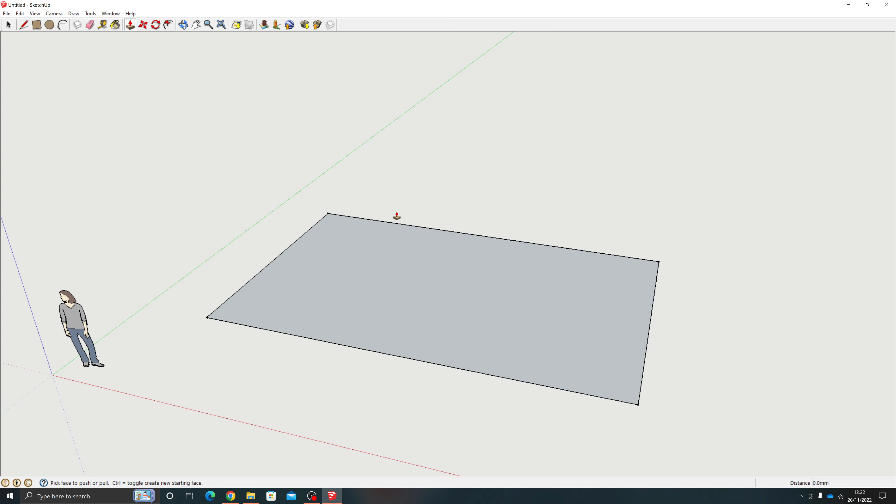So for our desk organizer, I'm going to start with a rectangle. As I'm doing this, you can always pause these videos, try doing some of these bits, and then come back afterwards and I will show you those bits. So don't feel like you have to watch the entire video and then try and do this.

Now I'm not doing this with measurements. This is more about getting used to the software and just showing you some useful bits, so I'm not going to use measurements at the moment. I just want to get used to how this works.

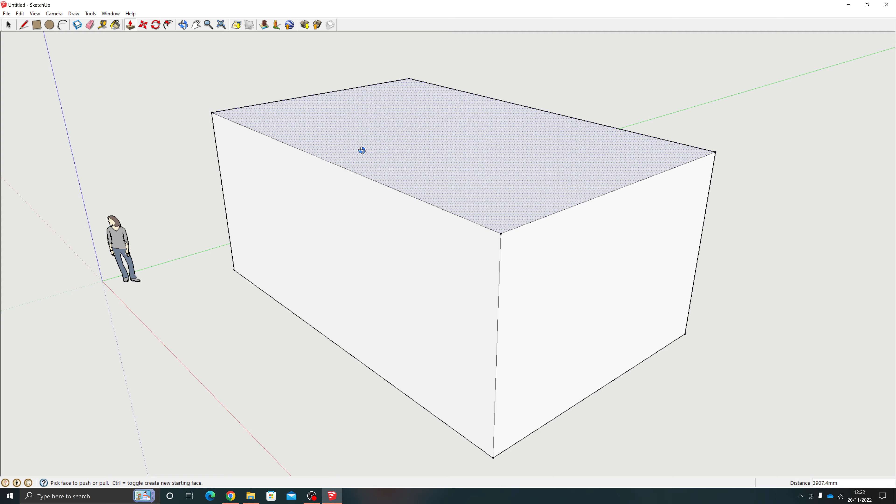So I've started off with my basic outside shell. What I'm then going to do is draw on this front face here. If you want to look directly at the front face, you can go to Camera, Standard View, and choose to look at it from the front. This means it will lock us to look directly at the front.

What this means is now I'm going to be able to draw on this without it confusing the software or confusing me. So the idea with this is I'm going to start adding some drawers onto here.

Now I could offset this slightly if I wanted to give it an outside edge, because my material would have a thickness. That's the thing to remember: when you're drawing on this, essentially SketchUp has like a zero thickness, think of it like a skin. It's very thin, so you have to make sure you tell it to add a thickness.

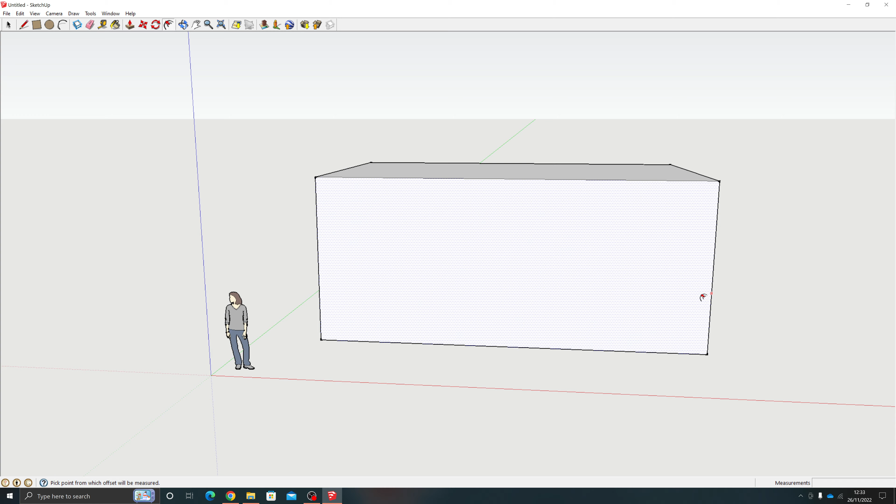So if I undo that, you can undo things by doing Control and Z. If I try to push pull this, it will think I want to make the whole object smaller. However, if I've offset this and chosen it to be away from the edge, if I now move this, it's only going to move the inner part, which can make it very useful for my actual design.

Now what I want to do is add a set of drawers. If I want them all to be the same size, what I can do is draw my shape. What I'm going to do is add a cutaway afterwards when we actually make the drawers.

So if I want to copy this, Control and C is the shortcut for copy. If you right click, there isn't actually an option for copy, so you have to remember the shortcut is Control and C, and then Control and V will paste it, and you should see that it is the exact same size.

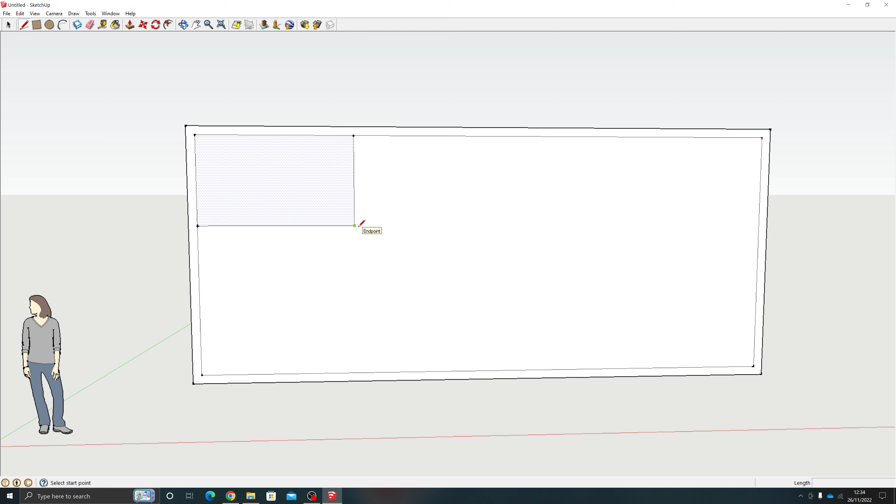If I line it up with this bottom corner here, I can then keep it aligned across here. If you want to make sure yours are completely aligned, you can add a line across here, and this will, when I paste it, mean I've got something to lock it onto, so I don't just randomly place them. If you want to be even more accurate, you can also add our tape measure, which I showed you in the previous video.

I could actually choose how far I wanted this to be spaced apart from each other, and I can put a little point on there, and that's just my measurement point to show me where I would need to position this. So if I did want to use a measurement from here, let's say, because this is quite big, I'm going to set this to 190.

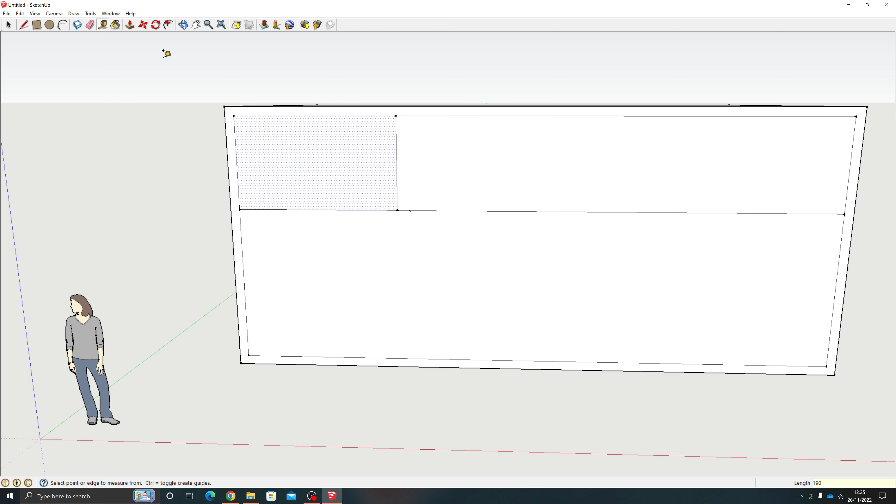So just for this one, I'd set it to 190. I'll click 190, and you can see that it's added the dot. Then I'll do my Control Paste, and it can lock onto there.

I could do the same for this one here. I'll click on this endpoint, do my 190, add my dot, and... doesn't seem to want to add my dot to that one. Let's try it again.

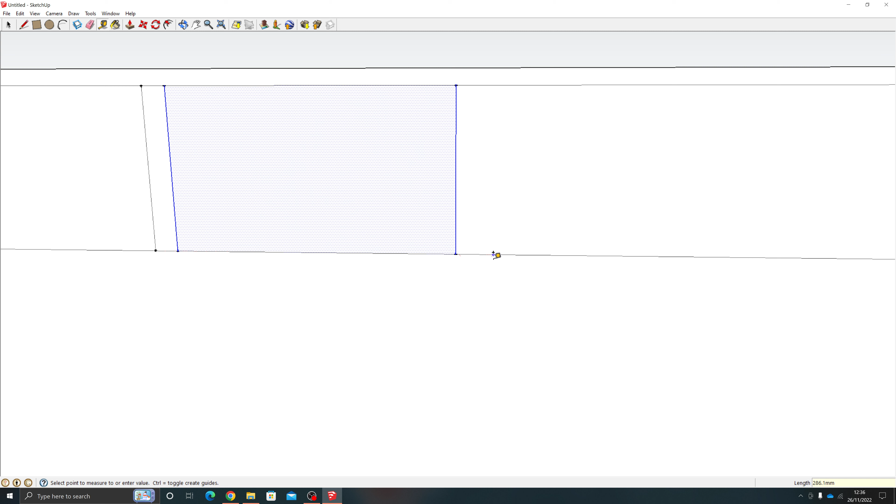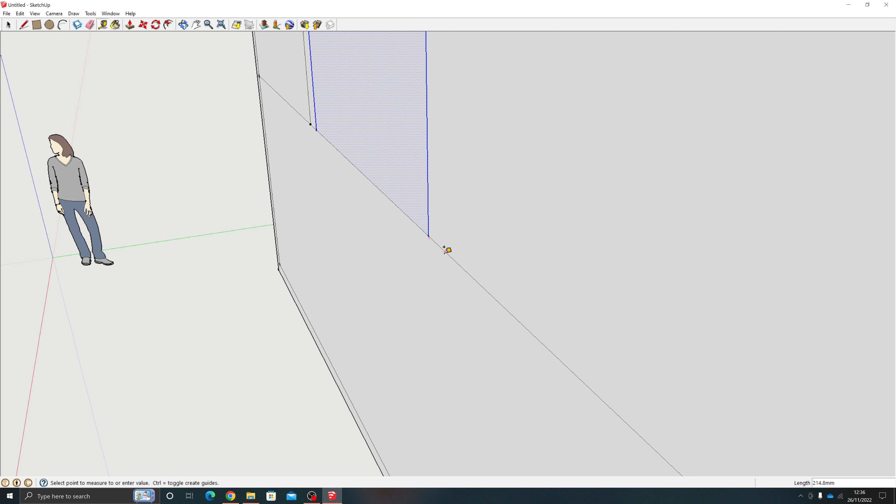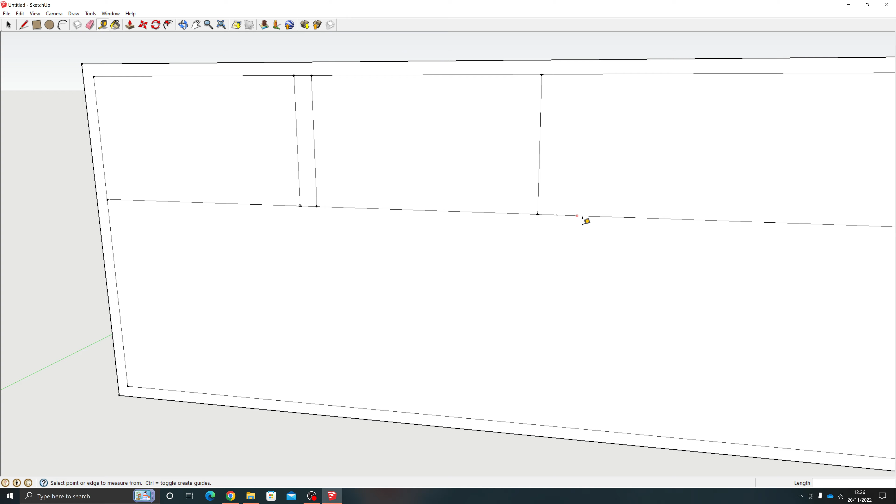I'll try it again. Move my mouse until I get to 190. Might be because I've got something selected, so I'll push escape and deselect everything. I'll try that again. That's better. It didn't seem to like that I had this selected, so you probably need to deselect anything you've got selected before you do that.

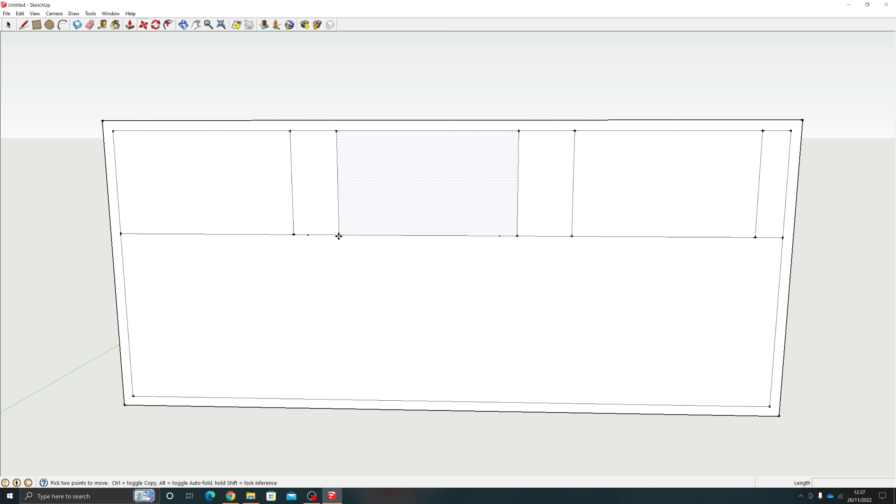Like so. Then I could decide to move these to space them out to different sizes. Because I've got them already at the right size, I can just space and move them. At the moment I'm just doing this roughly by eye - it's not about accuracy, it's about understanding these different parts and components. Once I've done this bit, I'm going to move this one as well.

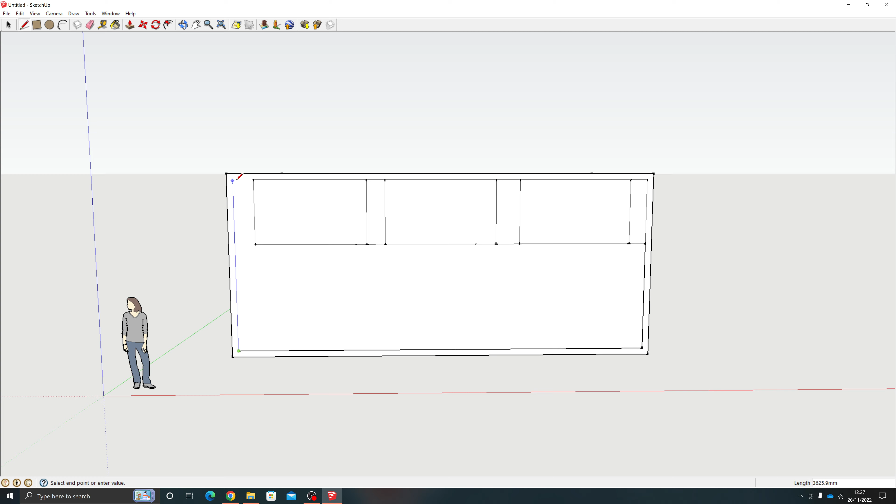So I'm going to rub out that line so I can move this across a bit. I'll draw the line back in, so that one goes up to here. I'll make sure it locks up to this line here. What I can do is draw a line across here, and if I get them to overlap, I can just rub out the extra line - same sort of thing you'd do in 2D design.

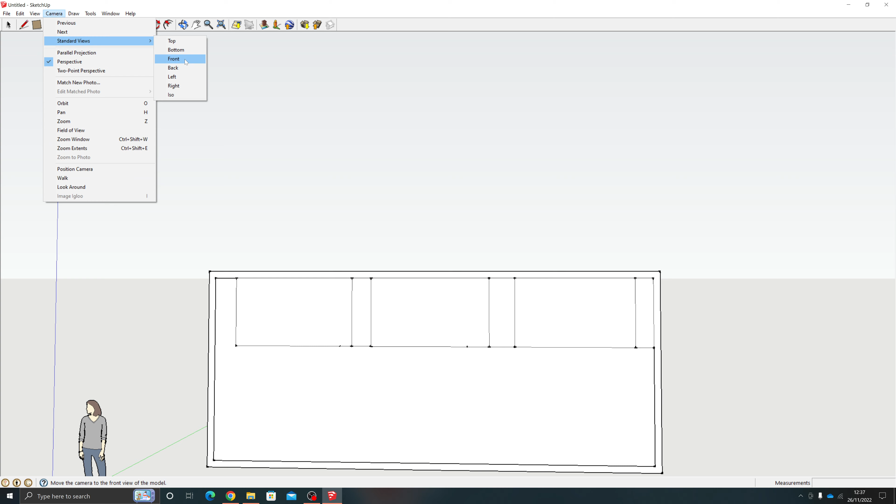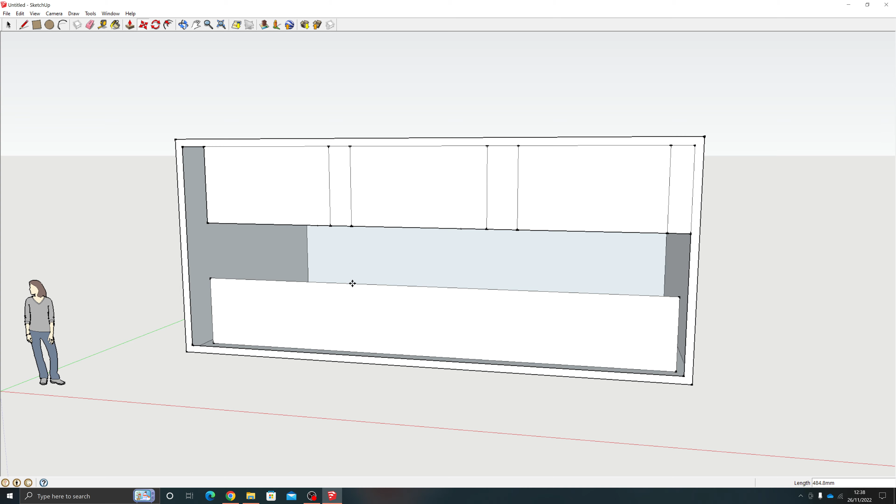If I go back to my camera, back to standard view, and look from the front again - it's good practice to make sure you're still looking from the front. I'll have my rectangle shape down here as well. Again, you can always move these lines to get them positioned how you want so they're in a good position. I'll do that again.

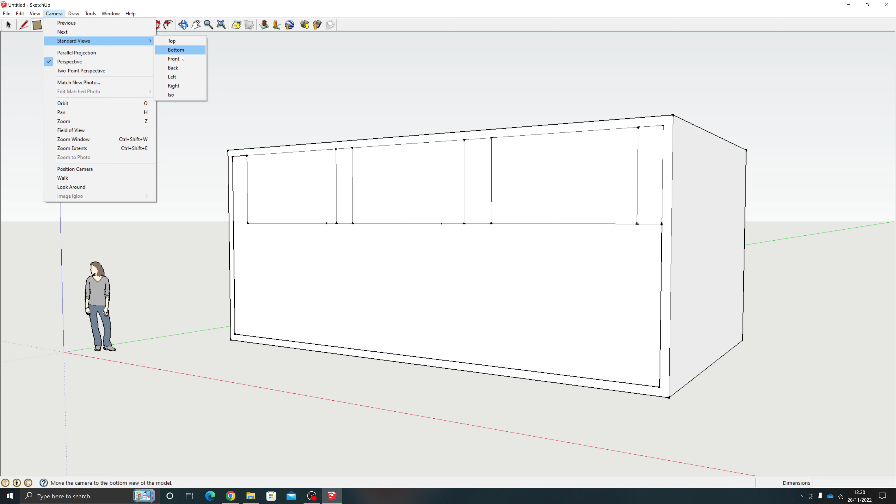It doesn't seem to like it if I do that, so I'll rub out these lines and draw them again. So again: view, my camera, standard views, front, and then I'll draw that rectangle again.

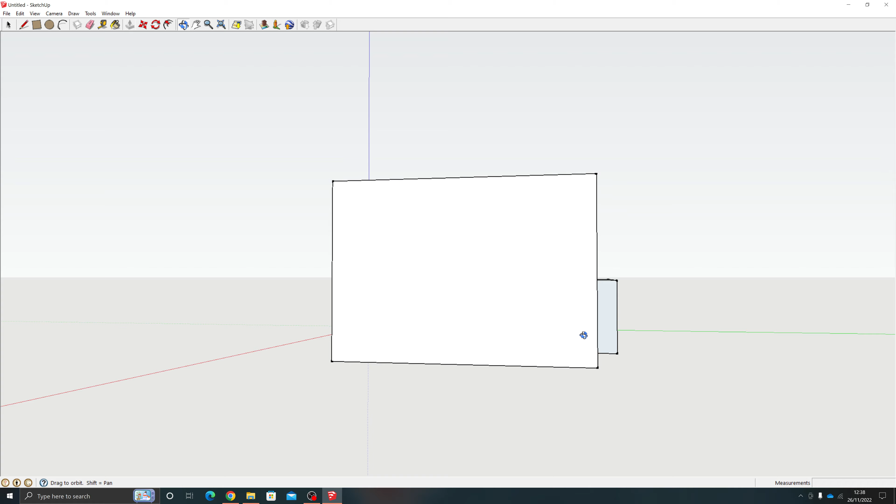Like so. Once we've got these done, if I drag these backwards, what I'm doing is giving this enough space to have drawers in. If I drag it to here, I don't want to go all the way through the back, so I'll do it to about there. If I want these to go back the same amount, I can make it go to the face - that means it's actually going to be pulled back the same amount, so you don't end up with it going all the way through.

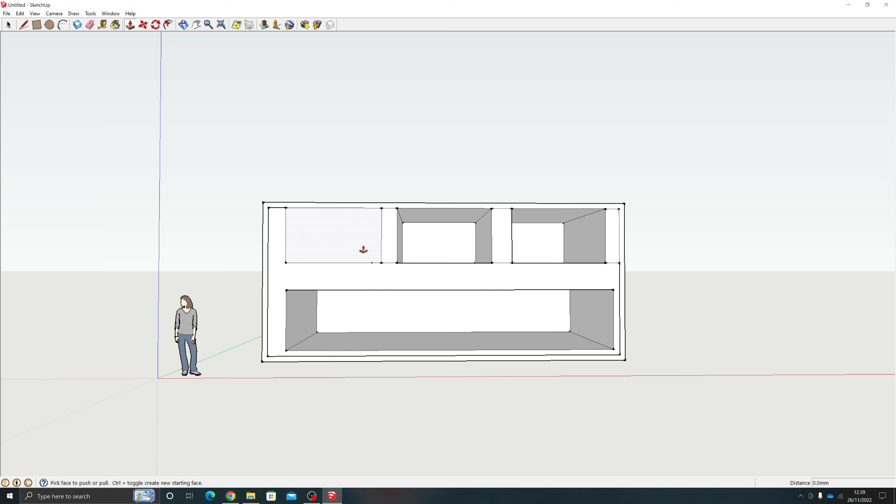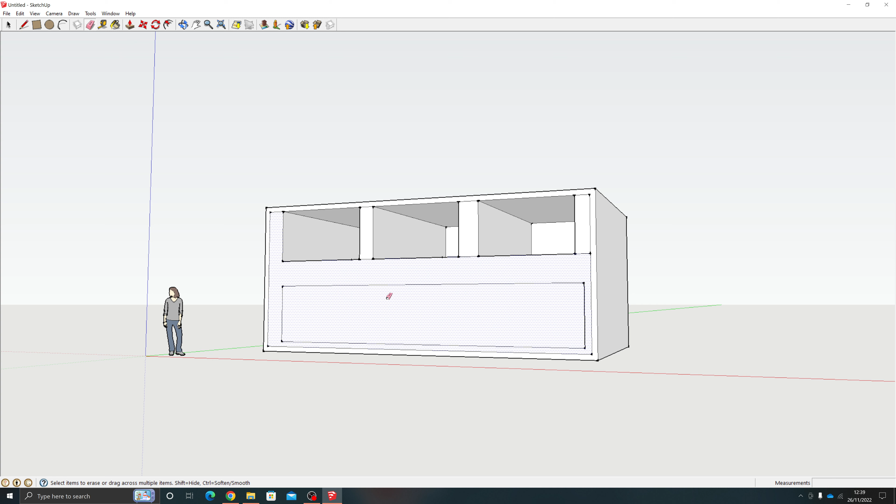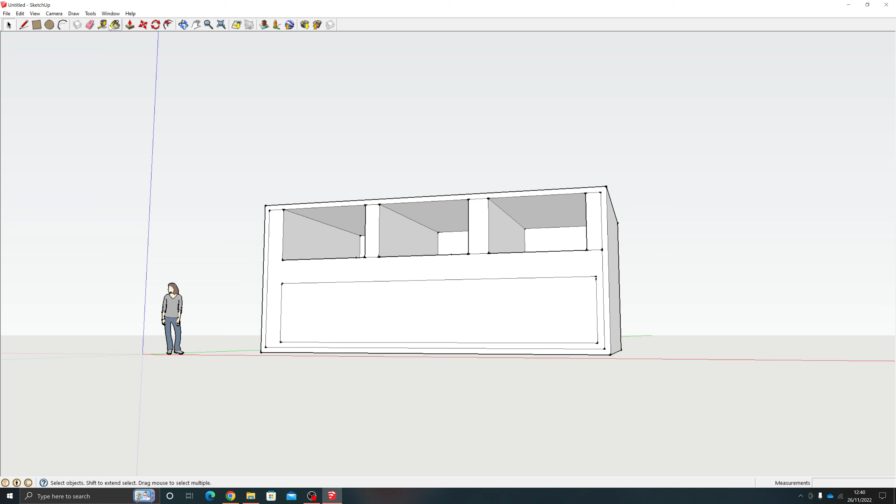You can just hover over that, and you should see it highlights to say 'on face' - that basically means it's lined up with it. Sometimes it will try to auto fill things in when you've done that. If you need to get rid of any faces, you can select them and get rid of them. If, like mine's not doing, it doesn't let you do that, you can draw the face again, then click on that, delete it, pull that back again, do that on that face, and then I've got my first drawers here.

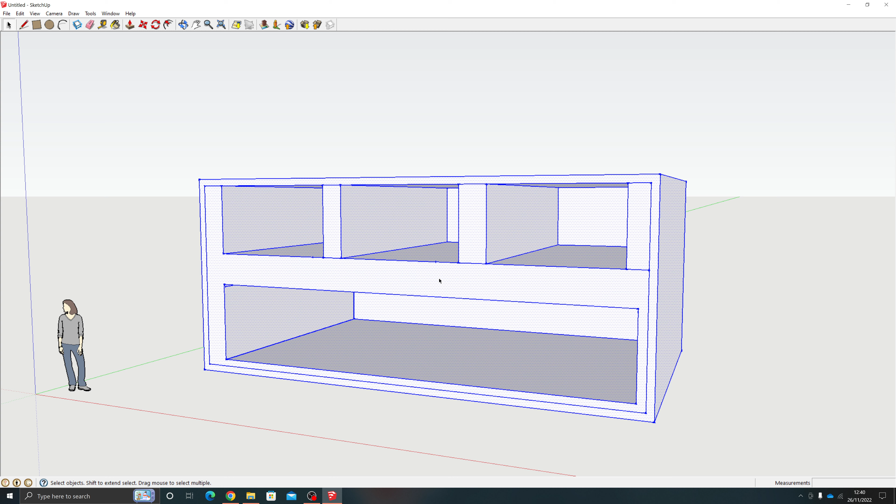Now I said before that we were going to look at making sure we had components. So what I'm going to do is select all of this, and I want to treat this as its own component - I don't want it classed as something else. So I can now select all of this, and do component or make component, which lets you give it a name.

So I might call it a desk tidy base, something like that, and then I'll do create.

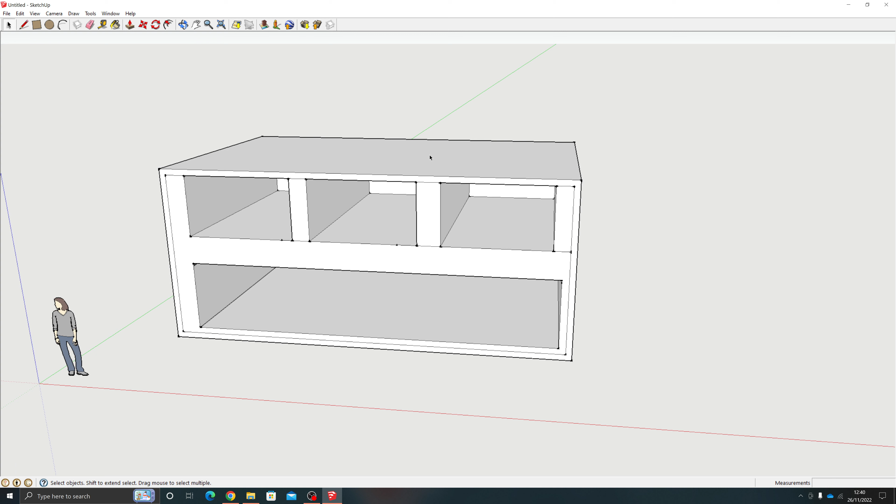So now that is classed as one component, so when I click it, it will select the whole thing at the same time. What this does mean now though is I can actually start drawing and designing other pieces and other parts.

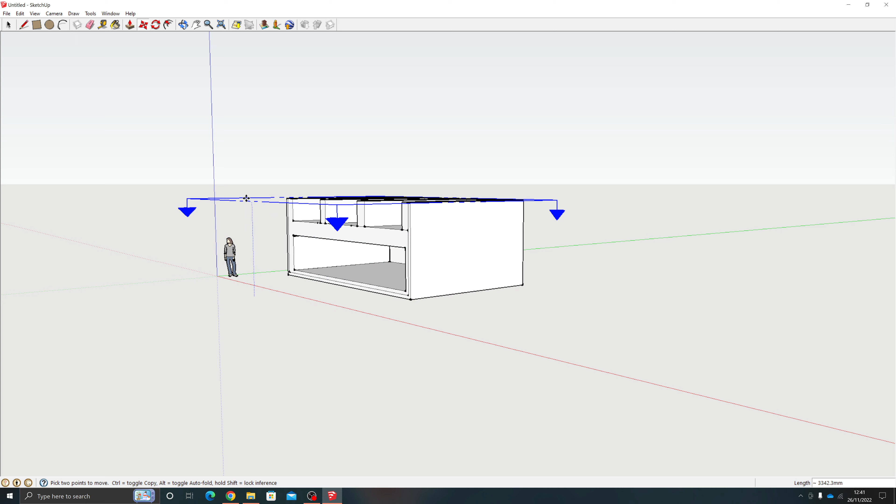Now sometimes you need to see through an object, so what we can actually do is use tools, and we can use something called a section plane. A section plane allows you to cut through objects. So I've clicked, and what it's done is basically drawn a plane, and if you imagine this as slicing through the object, I can click the move tool, and as I move that up, you can see it reveals more or less of my design.

So I want to get to this position here, because what I'm going to do is start designing the drawer that I want to go in here. And because this is a component, it means that my parts aren't going to accidentally connect to this. If you don't do components, what can happen is it can try and merge all the pieces together.

So what I'm going to do is have one side of the drawer. I'm actually going to add them as if this was the actual size of the drawer. Do it like so, and I can, again like we've done before, select this, Control C, Control V, and paste this over here.

And then what I want to do is rub out these lines here so that I've got a solid part that's going to extrude. Basically, I don't want it to be separate parts.

And because I want this drawer to fit flush with the front, I could actually fill this bit back in here and then use that bit here, copy and paste, and bring that to the front, and then rub these bits out. Now, again, some of these things you sort of figure out as you go along.

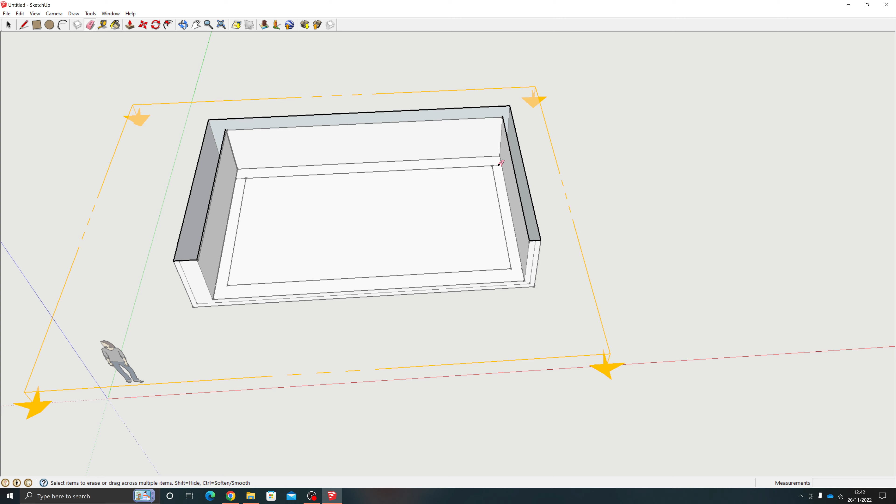There are different ways of doing this. I tend to use a lot of copying and pasting because then I can make sure that my components are the right size. And I'll bring this up to just below that point there.

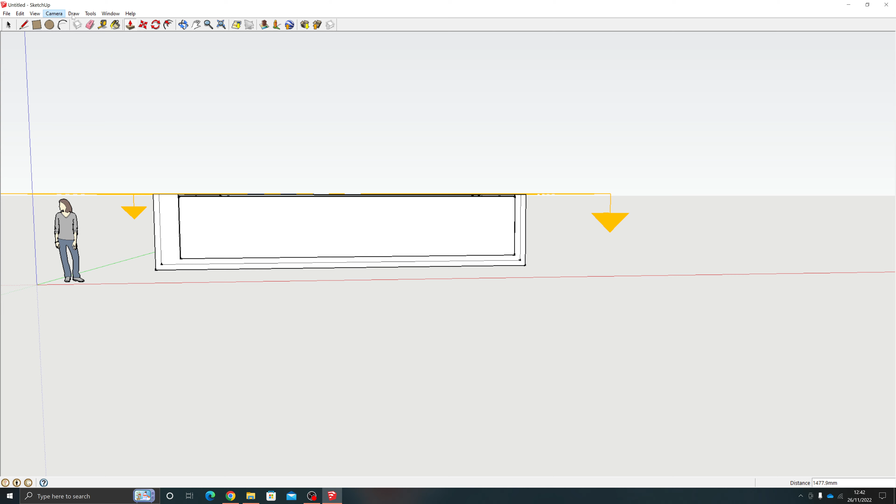And then what I want to do is look at the front view. So again, I'm going to go to my camera, go to my standard views, and go to front. I'm going to add a circle in the middle.

And the reason I'm going to add a circle is because I want to add a part that people can actually use their fingers to grip onto. You could use a circle, or you could use an arc if you want to.

So if you're going to use an arc, you'd need to draw it kind of the other way around. So what I might do, just to help me with this one, I might draw from this midpoint, and to make sure they're the same length, I am going to use measurements for this bit.

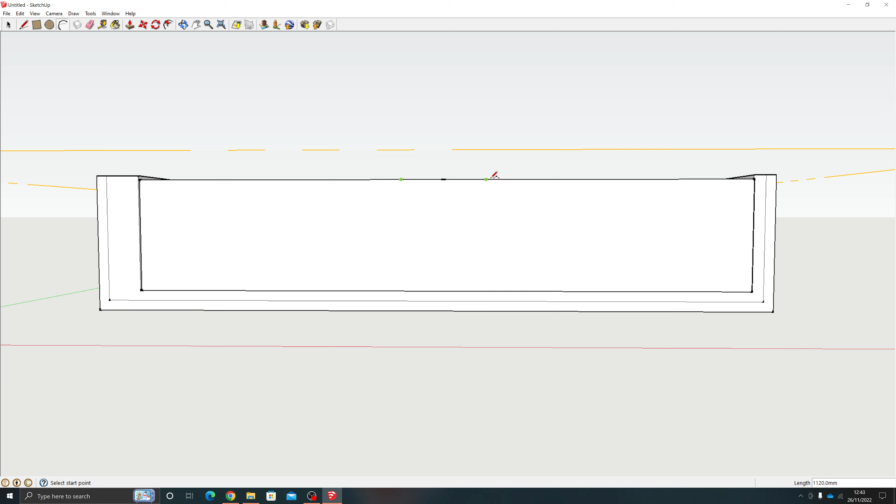I'm going to make them 560 across that way, from this midpoint 560 to the right, and then what I can do is arc from this end point to this end point here, draw this down, and then click, and then I've got my finger groove bit here that I can then remove.

Now when you drag this back, if you want to completely remove something, you'll see it says 'on face', and you can see it makes a different sort of colour. It goes and changes colour.

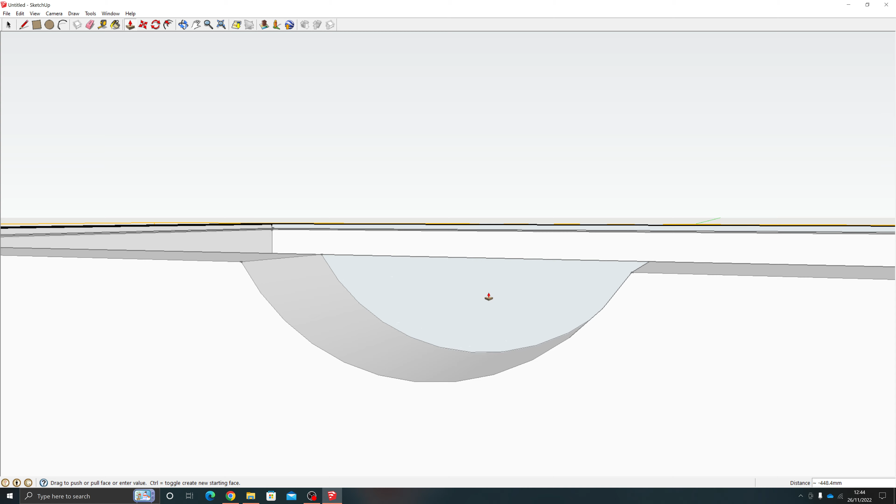So you should see that as I'm pulling it back, all of a sudden it snaps and changes colour. If it says 'offset limit' to blah blah blah, what that means is that if I click now, it's going to delete it. So you can drag all the way back and then delete, which can be really useful for any parts that you want to remove, like cutaways like that.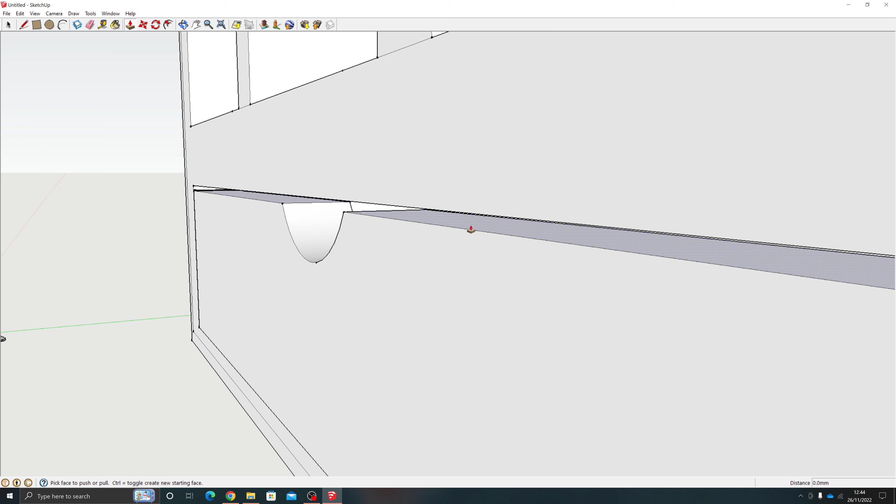Now I could drag this up, and you should see that I've actually managed to make this cutaway here. And what's quite nice is if I want to pull this up, because it's not quite right, I can actually just click on it and just drag it up.

I'm going to give it a tiny gap if I can. Okay, and again, you can zoom in to get more accuracy. So it's only a couple of, just a few millimeters under there.

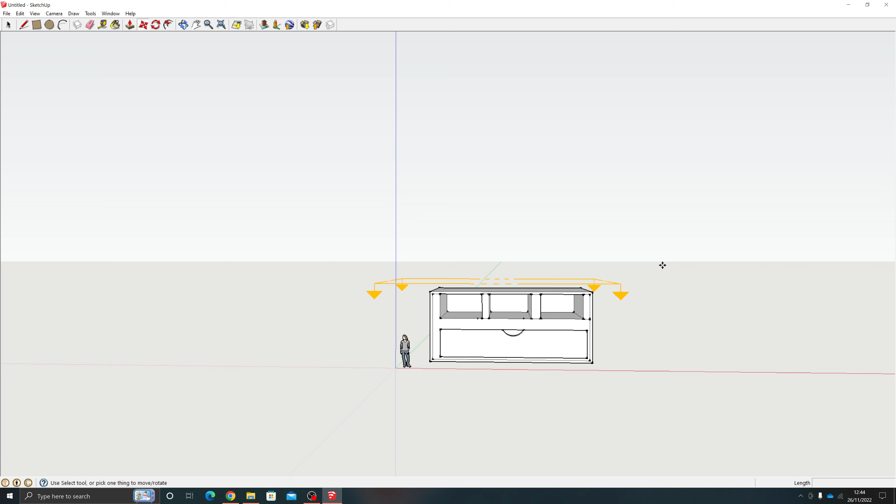Now this is where it becomes so important that you've used components. If you don't use components, this bit won't work. So what you have to do now, if I select all of this, is hold down Shift and click the exterior, and what I'm left with is just the drawer as a component. Now if I do make component, and I'm going to call this bottom drawer, if I click create, that is now its own component. So I can click that and select this separately as its own entity.

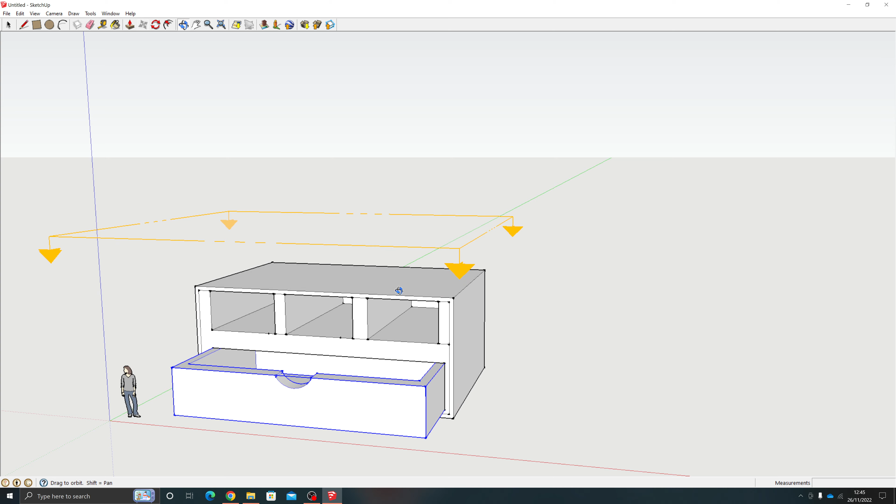Now, the reason that's so useful is because as part of my development, if I wanted to show this as a different view, I can actually move these out. So if I select the drawer, look at this from the top view, and click and move that, it now means I can show this drawer from different views. I could have these parts slide out, which can be really useful for your screenshots to show how you've created something. So it makes it much easier to work with.

I know some people try to create the drawers already out, but it's so much easier to do it this way as a separate component, and it saves you a lot of time, because I can take this apart completely and view this as its own component. So you can see, you can almost do exploded drawings because they are individual pieces.

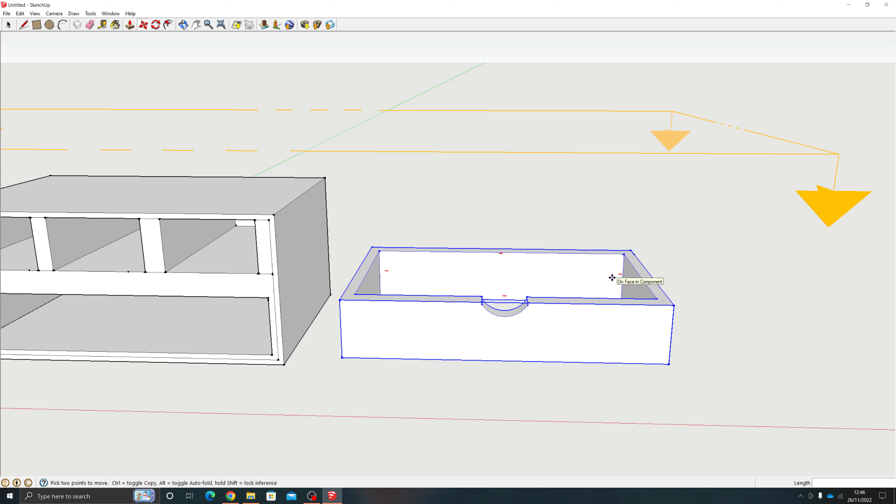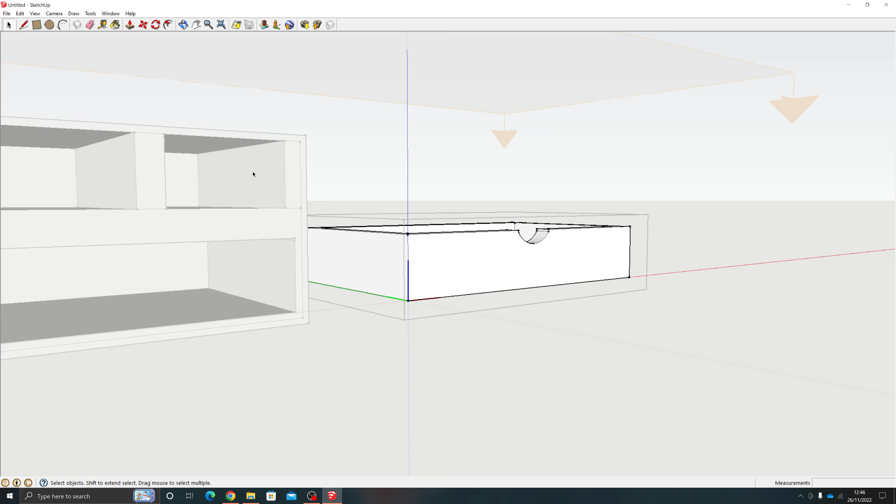Now, if I want to edit this one, because I've noticed this has no base on it, what I can do is double click on it. Oh, I'll deselect it - I've still got the move tool. So black arrow, double click it. What that means is I'm editing this component, so nothing else matters. I can't impact this product. I'm only drawing on this.

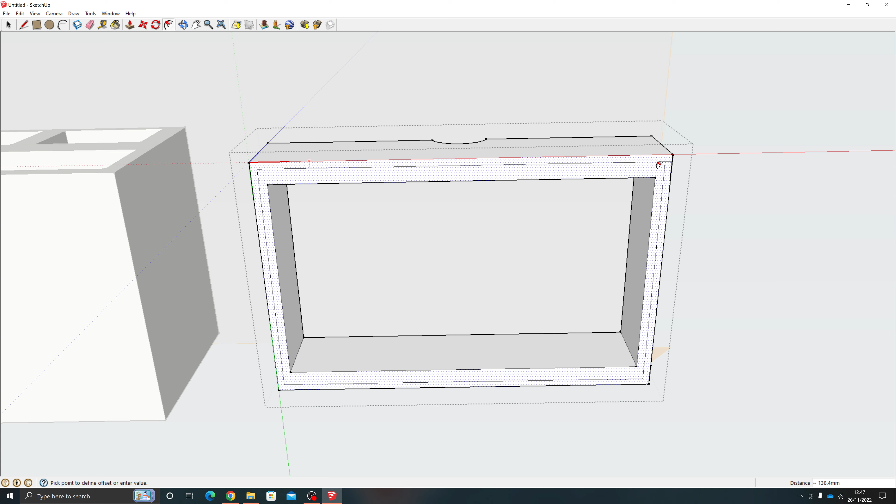So to make this a bit of a realistic base, I don't want to just glue a piece on the bottom because I wouldn't do that. What I would do is inset this using a rebate plane or a router to add grooves along the bottom here. So I'm going to offset this bottom piece like so, and pull this up to give it a cavity where I would glue an actual base piece on.

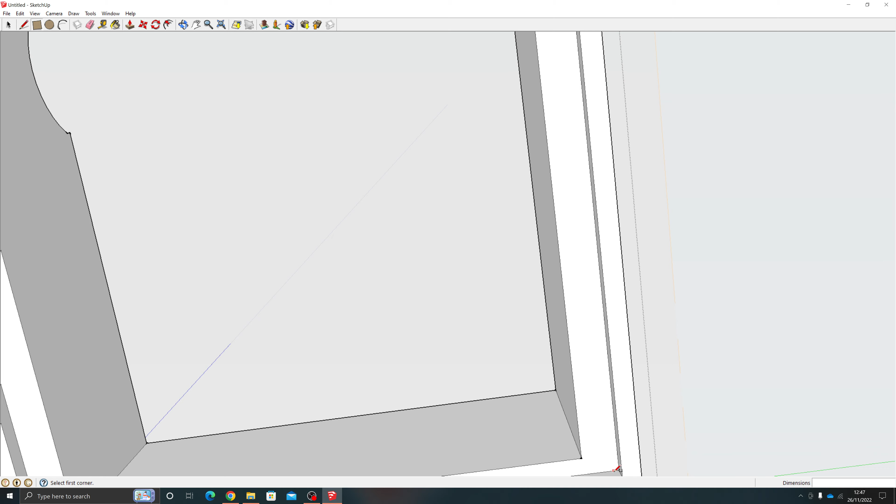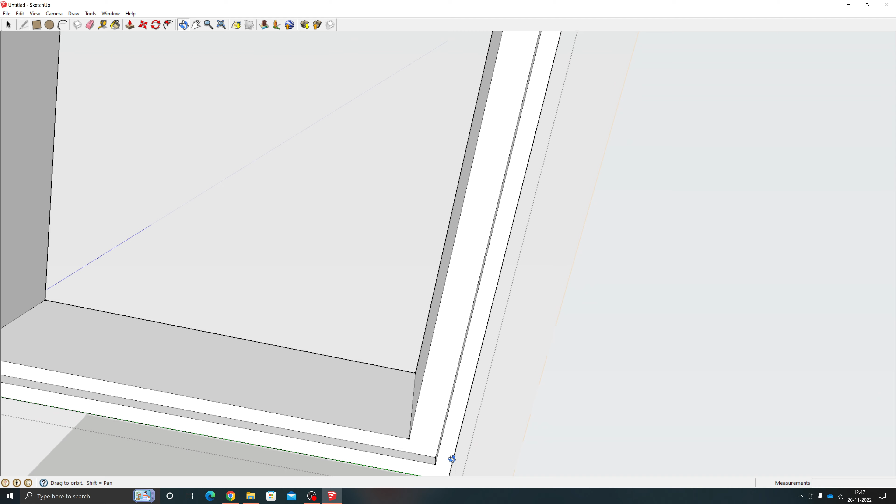I'm then going to draw my actual base piece going across, from this corner here to this corner here. Try and angle it a bit better there, so I'll get it to go there. If that hasn't filled in, sometimes you have to draw angled lines across to get it to fill in different surfaces where they're not quite aligned to each other.

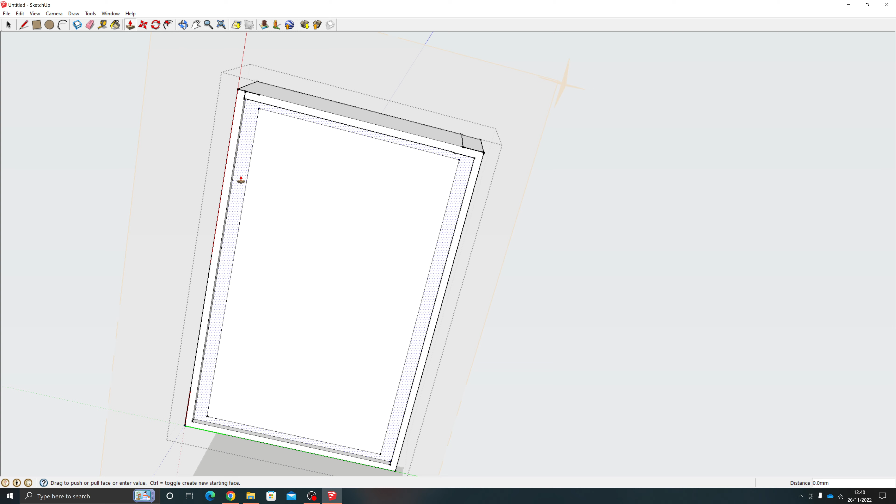So now that I've filled that one in, I can extrude this back down, but I'm going to rub out that line because I don't need it now that it's filled in. Now I'm going to pull this bit down and this bit onto there. So you can see I've got my base piece that would be glued in - I don't have to do it like that, but I think it looks nicer to really think about how you're going to construct this.

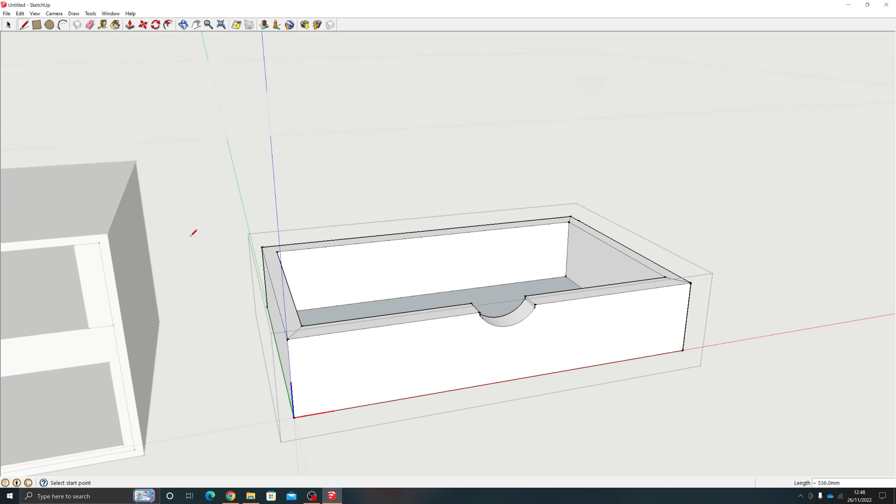And if you really wanted to, you could also have lines drawn here to show that you were going to use miter joins or something like that. You could draw your finger lines on here for your finger joins. So it just allows you to really communicate and visualize how your product is going to be constructed.

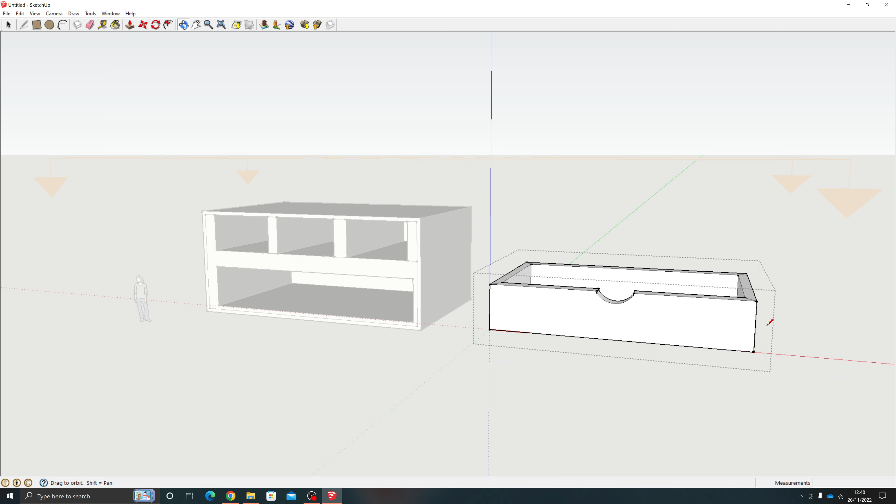And there's no reason you couldn't make each of these sides an individual component, like so. Now, I'm not going to make the other drawers in this video because I think you get the idea of this. So if you've managed to do this one and got your drawer to fit in and come out with everything working quite well, you can try some of the other videos and look at some of the other components you can work to create.